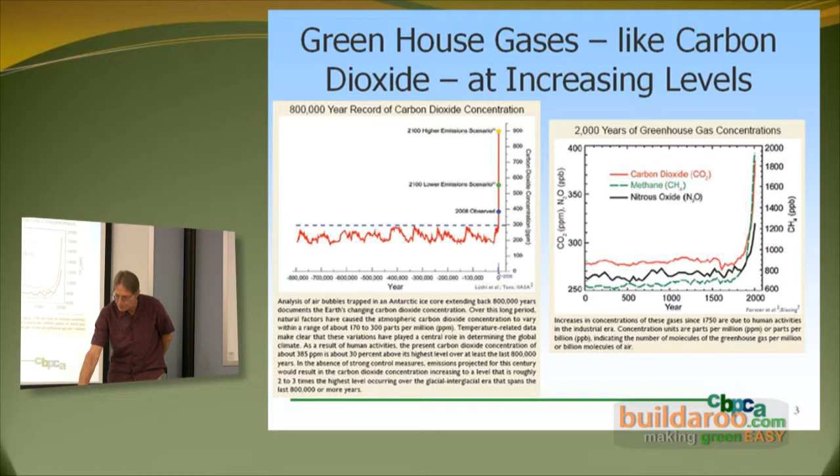You guys know about how much energy is being consumed and how the climate temperature is going up, so I'm going to skip over these and just say that on a nationwide scale, 40% of this country's energy is wrapped up in our buildings, from gathering the materials, putting them together, operating those buildings over the years, and then whatever happens to the building at the end of its useful life, hopefully recycling those materials. 40% of our energy, split roughly half residential, half commercial.

So this program here is addressing both the residential and the commercial. Big chunk. And as our administration in Washington now has committed itself, and as our state and local governments have committed themselves, they want to make a difference in terms of overall energy consumption and reduction of greenhouse gas emissions. So this is a big chunk of the solution, 40% of the energy.

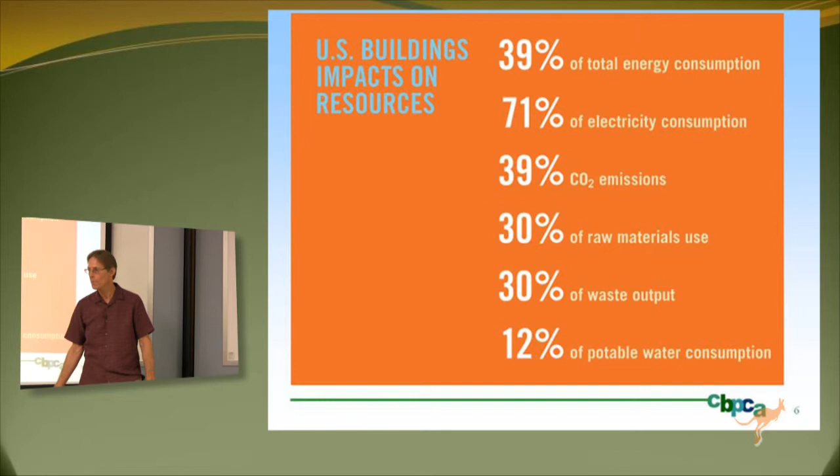70% of the electricity is wrapped up in our buildings. And when you think about electricity being produced principally by coal, that's still the main source of our fuel for generating electricity. In California, we have more of a natural gas-based production. Still, it's another form of fossil fuel, still generating greenhouse gases. So we're talking about a big part of what's needed if this country is going to accomplish what it wants to accomplish.

And here's our Secretary of Energy, Stephen Chu, speaking before the U.S. Senate Committee with Barbara Boxer chairing just recently, saying that we could retrofit existing buildings to achieve 50% energy savings with investments that will pay for themselves. How extremely fortunate that the solution to the problem, at least as far as retrofitting leaky, energy-guzzling buildings is concerned, is going to more than pay for itself.

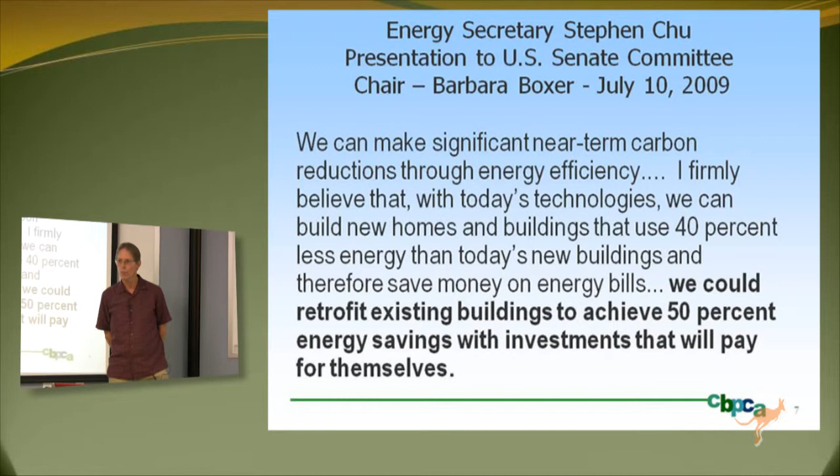It's not like we're going to have to sell somebody something with promise down the road. We have a proven solution here which, once enacted, provides immediate payback. And as we'll get into the different measures that we consider doing, some of them, the no-brainers, the ones that come first on the loading order, have extremely short payoffs.

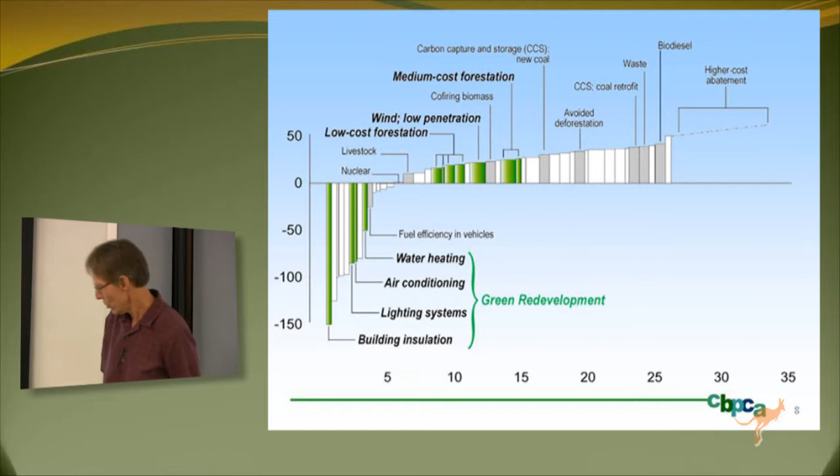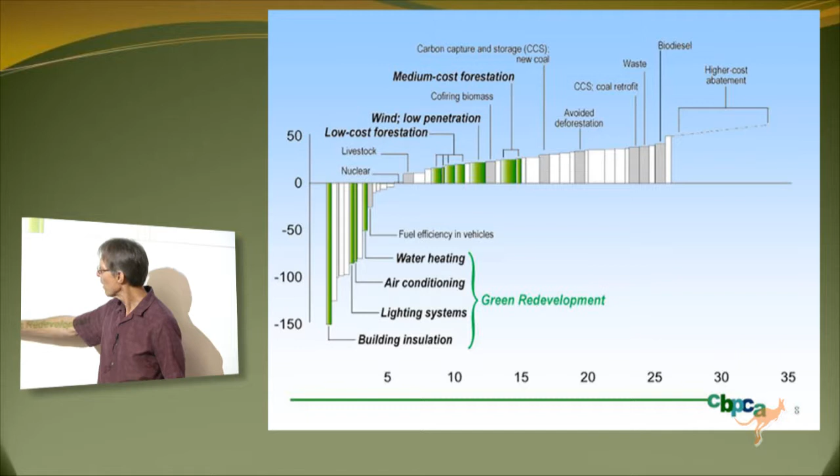This chart we could talk a long time about, but it was compiled to show how certain measures for cutting down greenhouse gases, principally redevelopment or refitting our buildings through insulation, through more efficacious lighting systems, more efficient air conditioning, heating, water heating. These things, these big negative numbers, mean that they basically pay for themselves in an extremely short time, and they go on paying for themselves many times over during their lifetime.

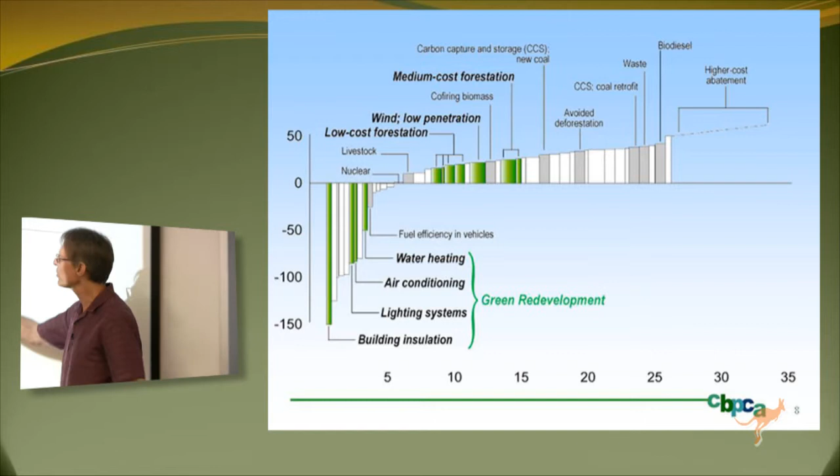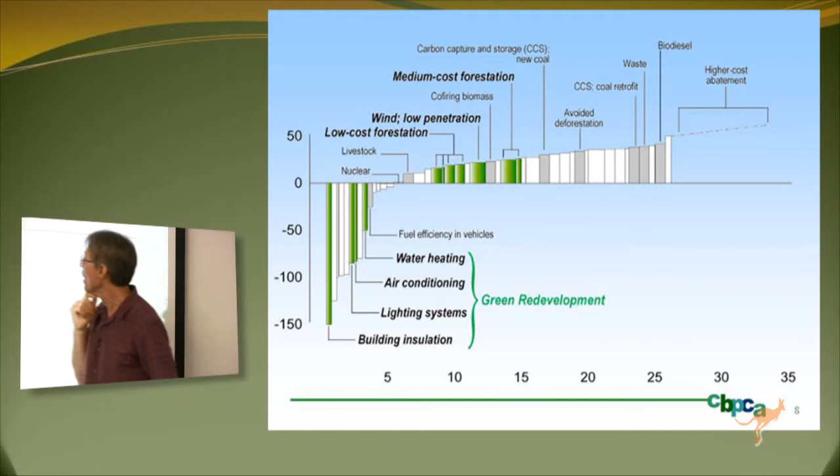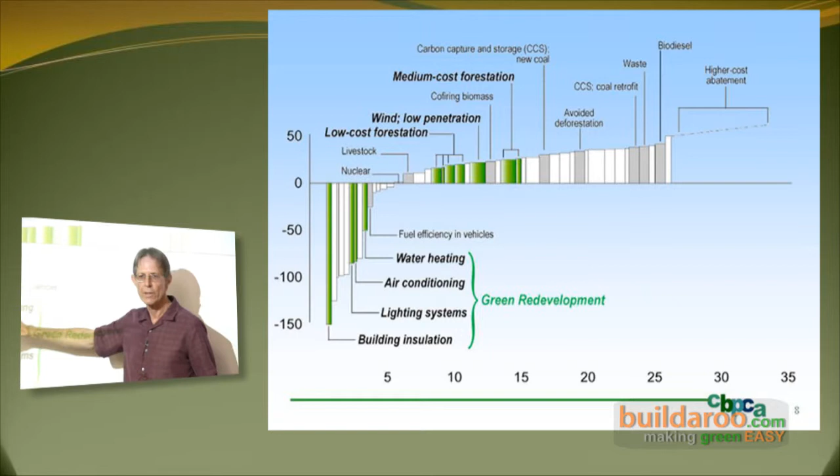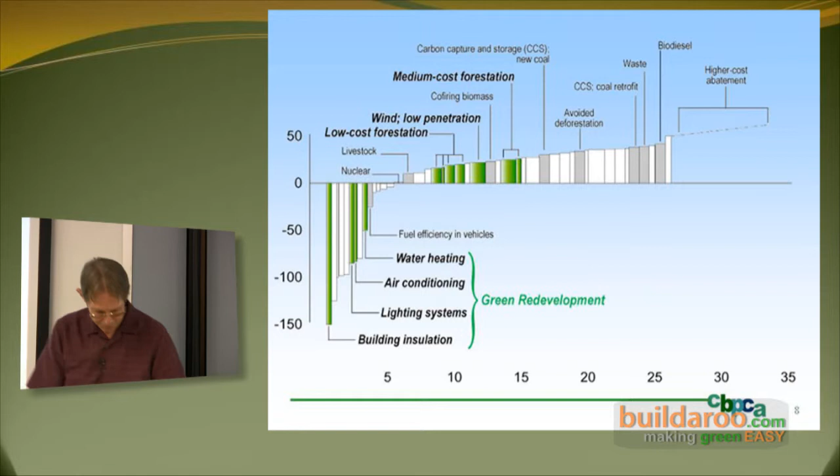Measures over here, you've got to invest a little bit more. The positive number indicates you've got to fork out more money to make them happen, takes longer to pay back. That doesn't mean it doesn't pay back, and it also saves greenhouse gases. But solar systems, PV and solar thermal systems, are up here somewhere. So you can see how much more of a no-brainer doing the retrofit energy saving measures are. Reduce first, and then figure out what size of clean, renewable energy generation you need to be able to operate your home now that you've got it using less energy.

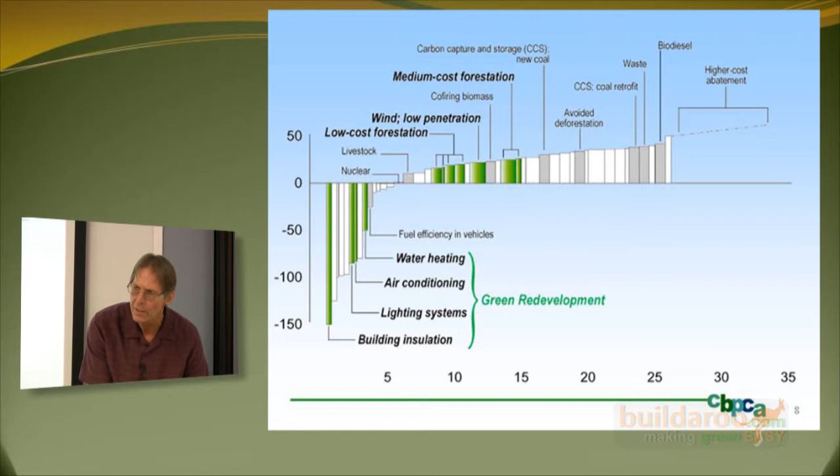Peter, what's the source of that? That is from McKinsey, and it's available online, mckinsey.com. It's got a very misleading thing in there about nuclear power. I'm sorry, but it's one of my pet peeves. Okay, come back to that. I would, that's okay. That's an offline conversation. Okay, let's continue that more.

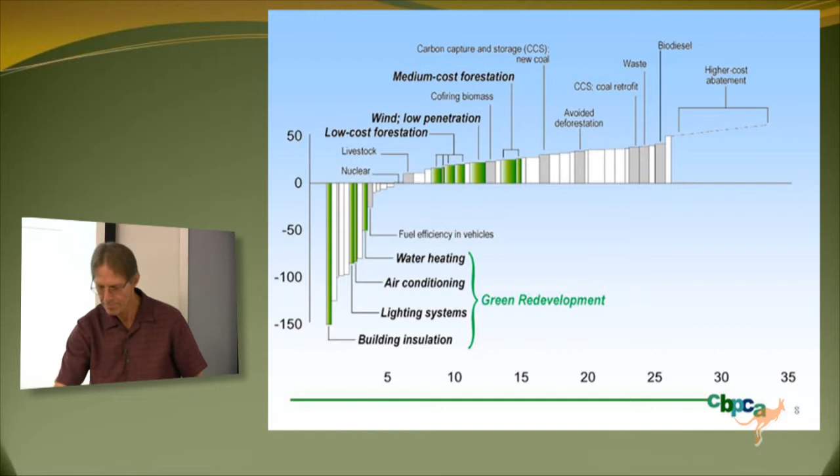I just want to show relative. If you can save energy, it's the first thing to do. So, and we've all got our part to play in that. Okay, let's talk effect.

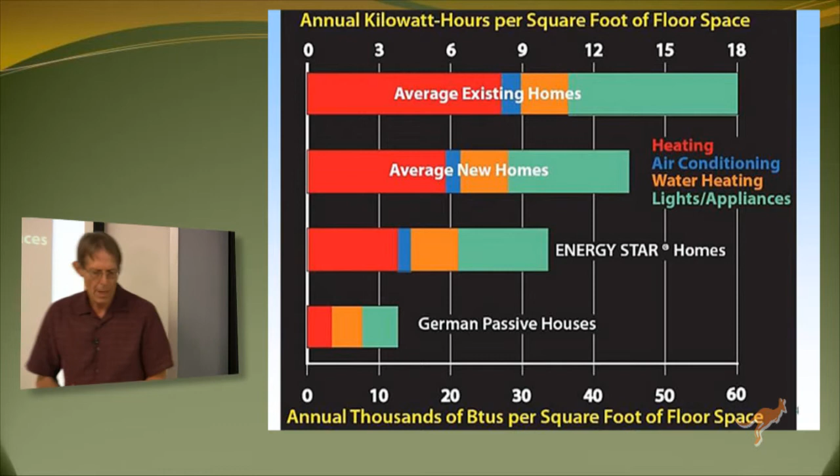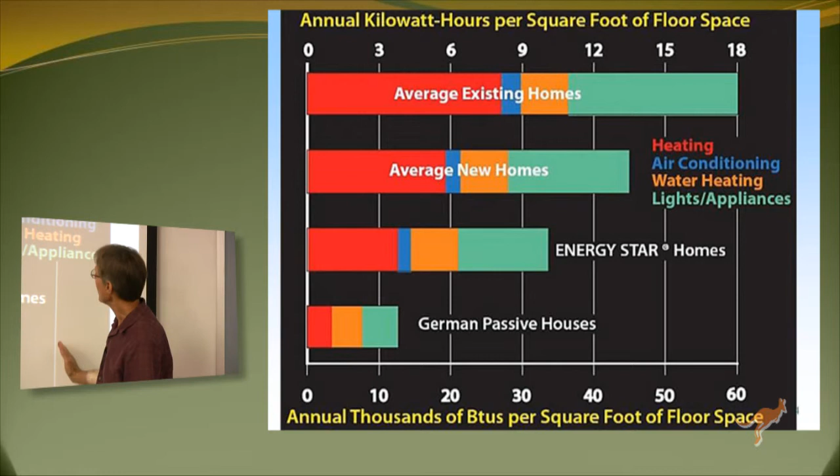So here's our buildings over the times. The average home consumes a certain amount of electricity. You can either measure it in terms of gas or electricity, but it consumes a certain amount of energy. Those are existing homes. New homes are doing better, thanks in California, principally to Title 24. But even that leaves a lot to be desired. Energy Star homes, which we hear quite a bit about, are somewhat more efficient.

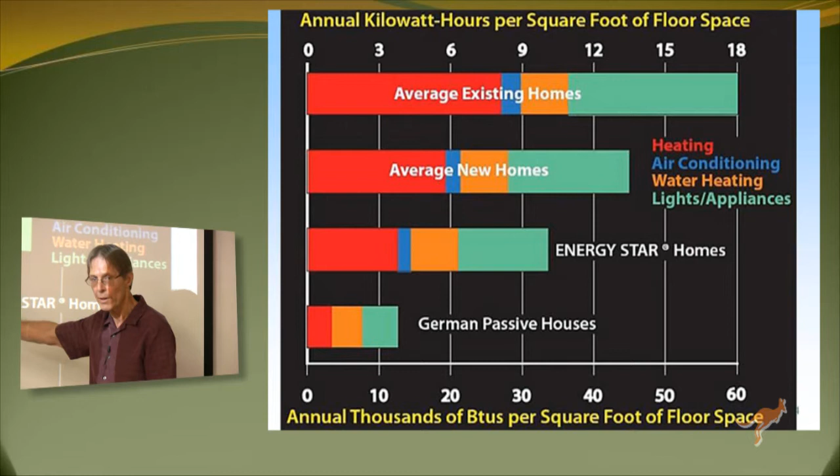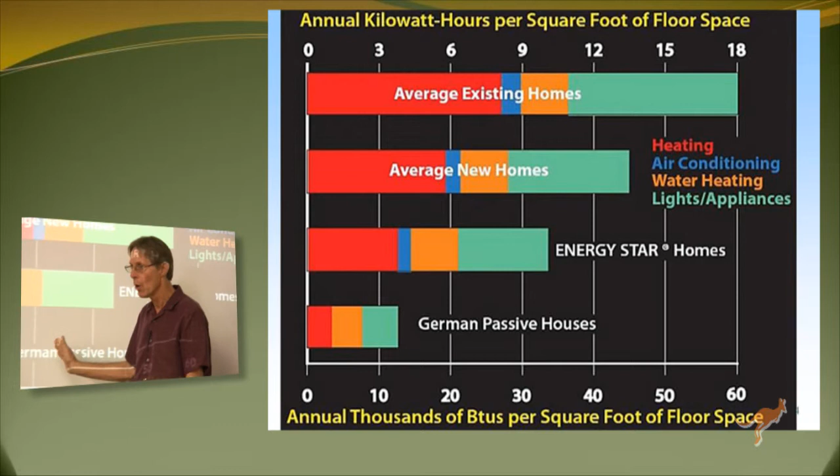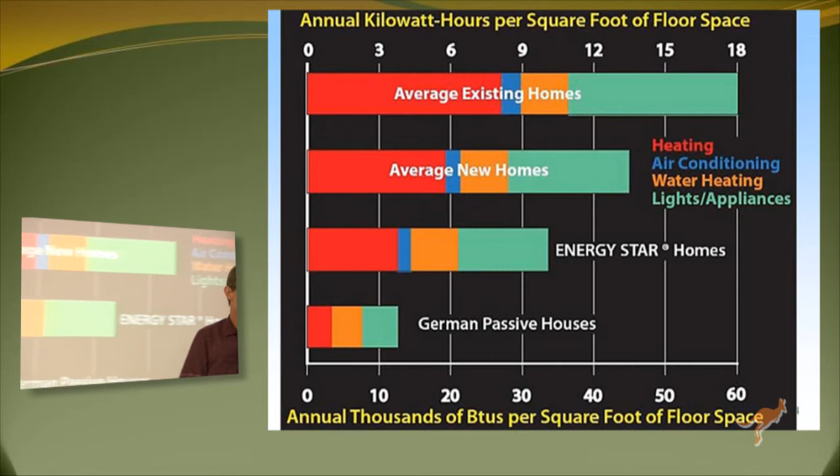In terms of where we have to go, the Europeans, starting with the German passive house, have been working on this long enough to have 20,000 homes where they've cut energy use down to a certain level. When Steven Chu says we can cut our energy use in half, that brings existing homes over to here, and there's still more room for improvement. Paul and I have found in homes we've worked on that cutting energy use in half is a very realistic target. Then think about what size PV system you need.

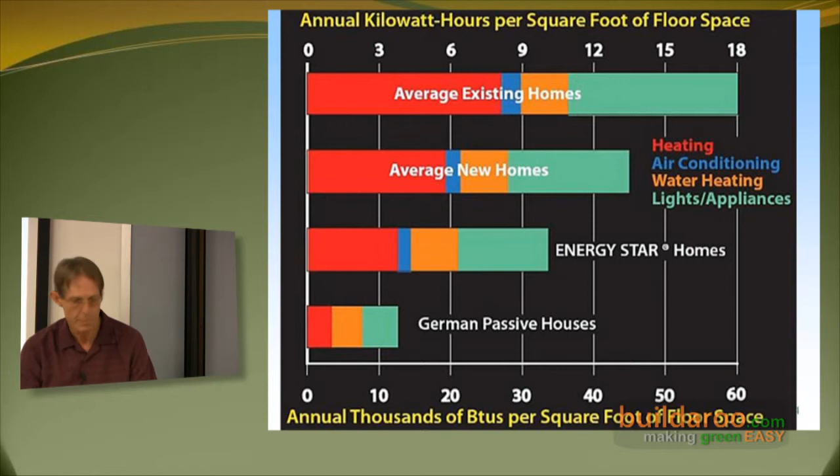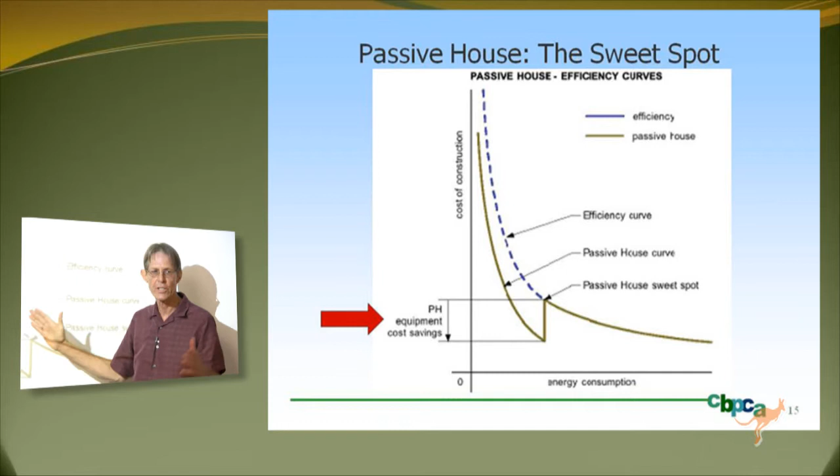Just one quick word on passive homes, this is a whole discussion in itself. As you try to make your house more and more efficient, cutting down energy consumption, it starts to cost more and more dollars, and at some point it becomes prohibitively expensive. But the amazing gift is that if you tighten up your building shell, your walls, ceiling, and floor, so it's no longer leaking, and insulate it really well so you're not losing much energy, at a certain point you don't need a central heating and cooling system. So you save a big chunk of money, and that puts you on a whole other curve and opens a whole other ball game.

We would like to get homes that are demonstrating how this is possible. In West Marin, we have two homes, a new to-be-constructed home and a retrofit home, that are actually going for this passive house standard. They will not have a central heating or cooling system, and they'll have a little device called a heat recovery device.

Is West Marin in the county? Yes, it's in the county part of Marin. Are they also subject to requirements where if you're over a certain square footage you have to create so much renewable energy? Is that some of the emphasis behind what they're doing? No, they're doing it because it's an affordable housing nonprofit group, and they want to do the right thing—provide affordable housing in an environmentally conscious fashion.

This is the CLAM project. If you drive up one out of Point Reyes Station, past the school, immediately after the school is what they call the blue house—only it's not blue anymore because all the blue siding came off, and they're doing a really drastic energy retrofit on it. On that same property, later in the year, construction will begin on a new second unit that will also be built to passive house standards.

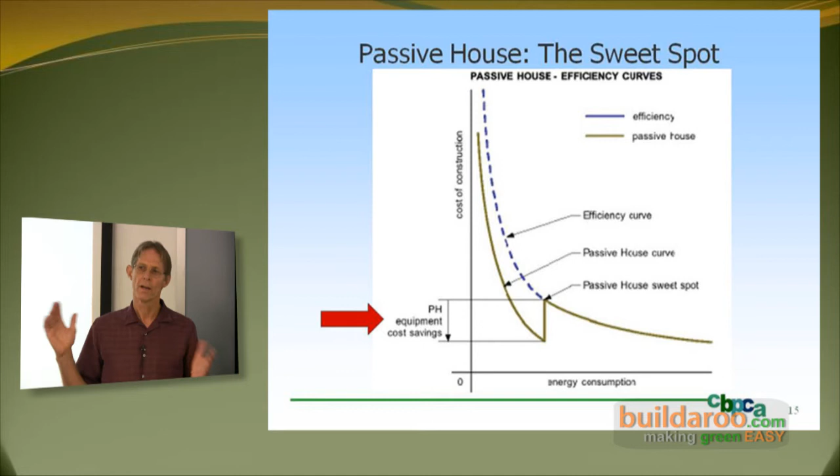One question: is a passive home feasible in any climate zone? Absolutely. Most European countries have much more rigorous climates. They've built them in Minnesota, in Canada, far more rigorous than New England. We have it easy in California, and in fact that's part of our problem—we've had it so easy that our construction industry has been lazy. For decades, we have houses that were put together with no thought about leaks.

Plumbers—I used to be a plumbing contractor—my crew would be drilling holes through framing members with no caulking, no sealing. Electricians do the same thing. There's airflow that goes from the crawl space up through the attic, freely through the walls. The good side is we have huge opportunities. We can make our homes far more energy efficient with very minimal cost if we're careful and know what we're doing.

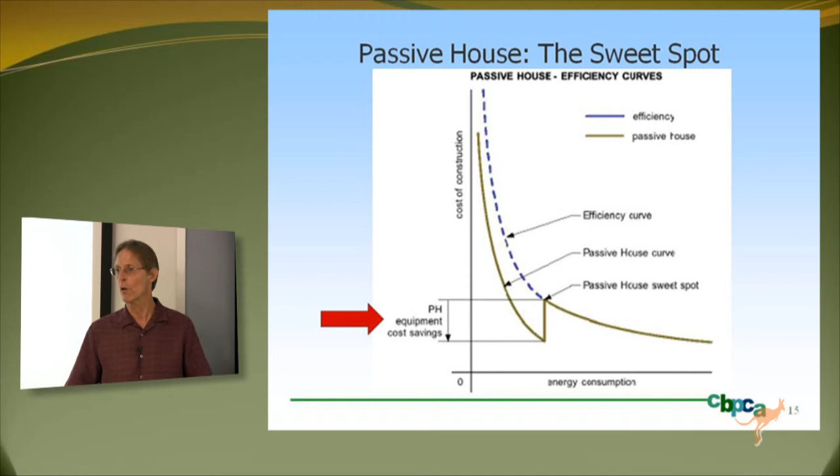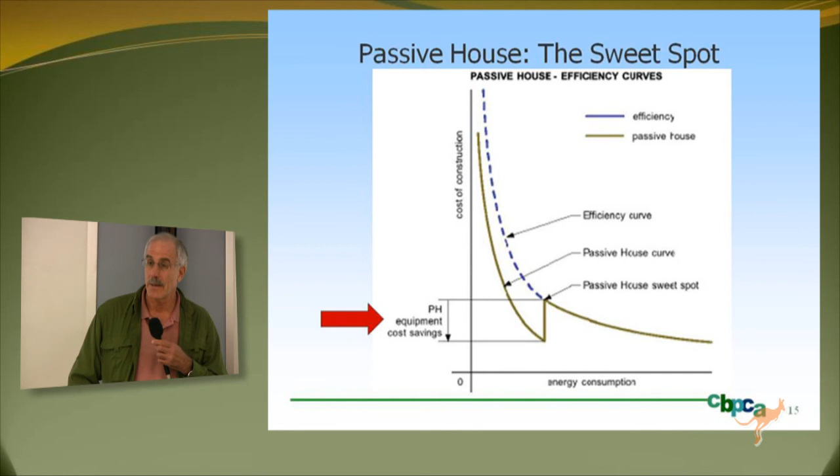Hi, I'll take over for a little bit. Peter and I are swapping back and forth. My name is Paul Rosen. I'm a general contractor, among a few other things, and I've been involved in this for four or five years now. I thought I knew what I was doing, like Peter said—I've been a licensed general contractor for 30 years and built some pretty good homes. But it was only about four or five years ago that I started to realize how little I knew. I hope we're able to convey to you what we're trying to accomplish.